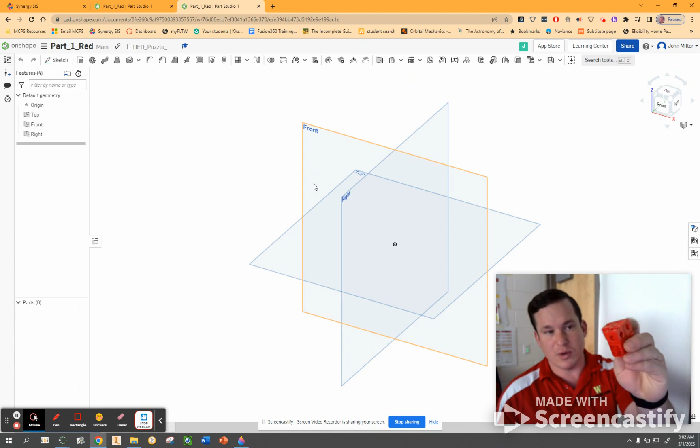Go ahead and come into or open up my red part. And just like we drew before, we want to pick the best front view. So for me, this is going to be the best front view. So for you guys, that's going to be the front view. I'm going to make it this way. I don't know if that's flipped in the mirror, but let's go ahead and get started.

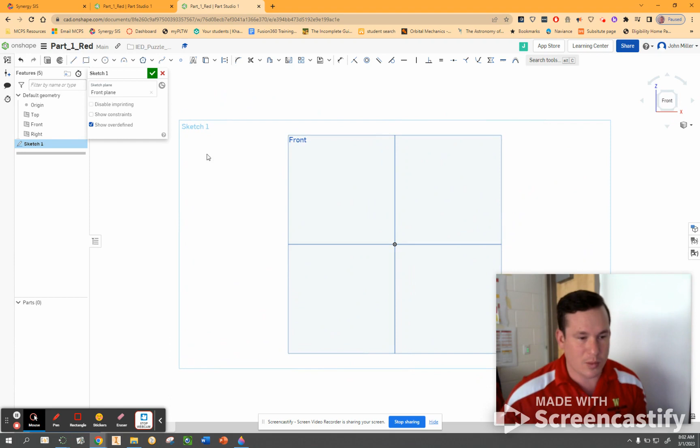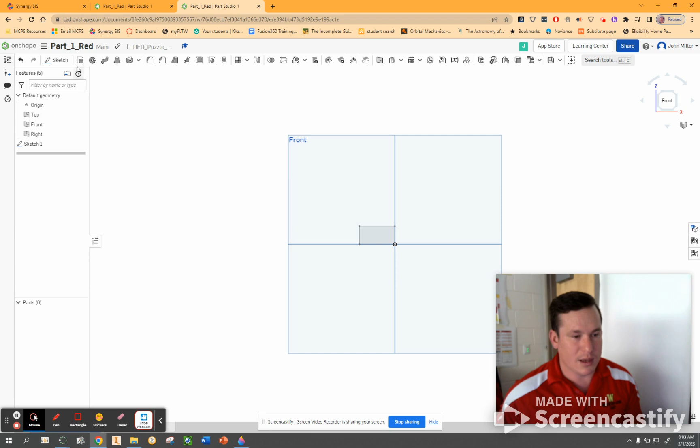I'm going to sketch on the front plane, hit N for normal. I'm going to make a rectangle here. And because we're doing half-inch cubes this year, this is going to be 1, enter, 0.5, enter. Check. And I'm going to extrude this a full inch. Check. Yep. So you can see that looks just like the bottom of this guy.

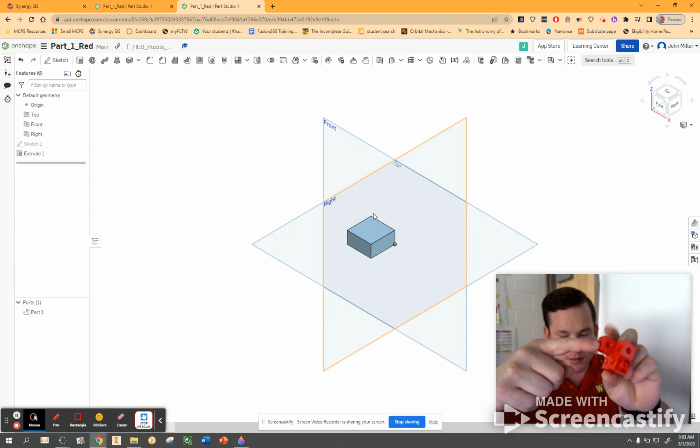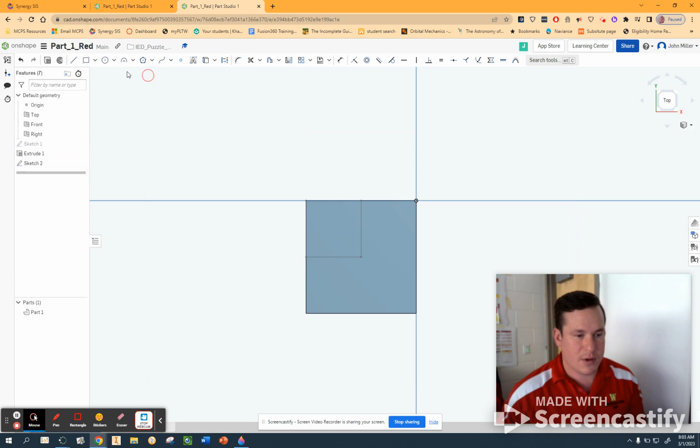Now I'm going to want to put this piece on top right there. Start a sketch up here. I'm going to put a rectangle in here. Click. 0.5, enter, 0.5, enter, finish, extrude, that guy, and I only want this to be half an inch, enter.

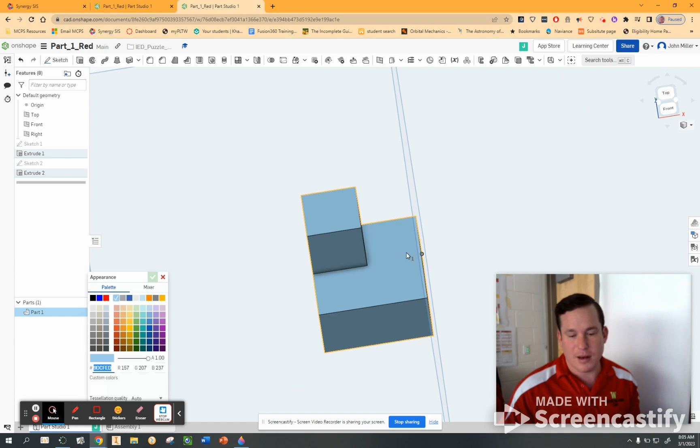Okay, so to change the color of this part, we're going to right click on it down here at the bottom, edit appearance, and we can pick a color. So this one is going to be red. Check. Make sure this is saved. Any green check marks. And then we're just going to go back out and we should be able to start the next part soon.